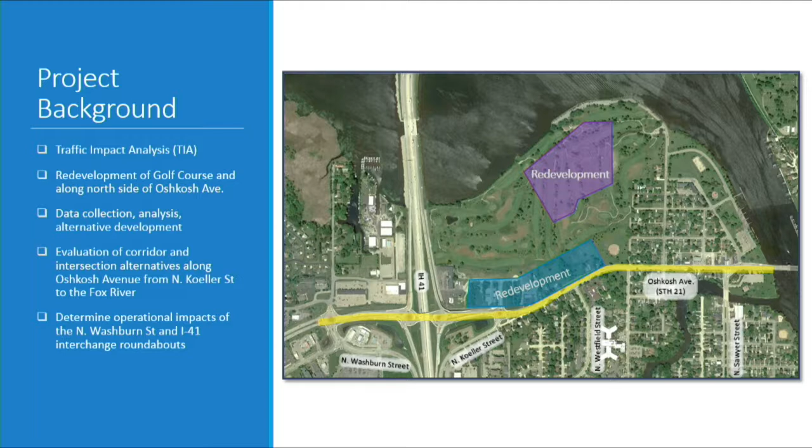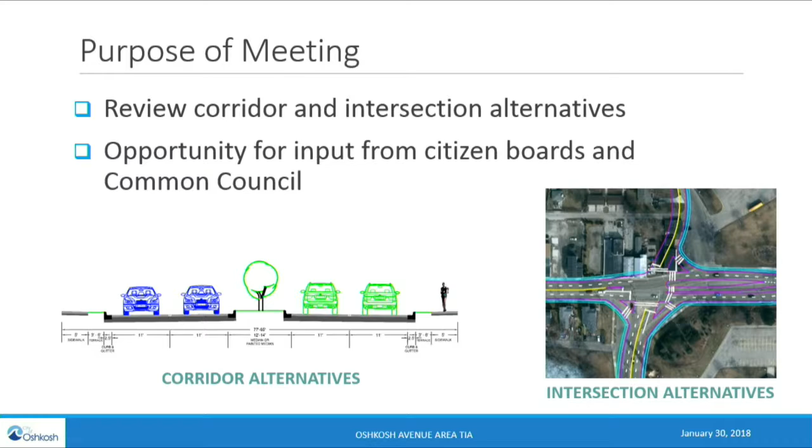Our main focus was the intersections in the corridor that is operated and maintained by Oshkosh, from Koeller Street to Sawyer Street on the east side of the interchange. West of there, at the interchange and Washburn, we just looked more at operational impacts, which we won't go over as much today unless anybody has questions. So the purpose of this meeting is to go through some of the alternatives quickly, talk about the recommendations, and get any input or questions from you guys and from the public.

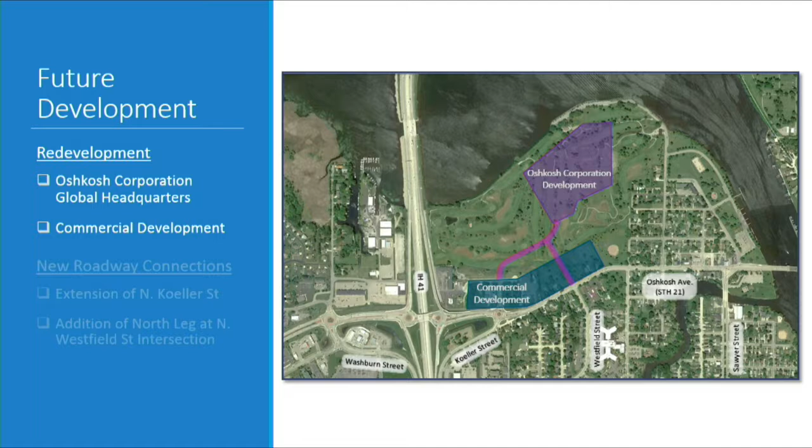As far as future development goes, I'll kind of quickly go through this. Oshkosh Corporation development is taking over some of the golf course that's there now, and in addition, there'll be some commercial development on the north side of Oshkosh Avenue. As part of this, we'll have 2 new roadway connections: an extension of Koeller Street to the north, and an addition of a north leg at the North Westfield Street intersection.

Just to give you a little more background about the process we went through, we coordinated with East Central Wisconsin Regional Planning Commission and developed background growth and traffic growth conditions. This would be any development outside of this particular development, to help us understand what the current needs of the corridor will be in the future. From there, we also developed traffic volumes for the new Oshkosh Corporation headquarters and that commercial development, and then assigned trips to the network.

Frozen? Oh, there we go.

From there, we did a traffic analysis. We looked at existing conditions, development completion in 2025, and a horizon year, about a 30-year lookout to 2045. We modeled with and without the development traffic and analyzed all the intersections from Washburn to Sawyer Street.

So to start, we'll begin with our corridor alternatives. I'm going to briefly go through all of these. Feel free to stop me if you have any questions.

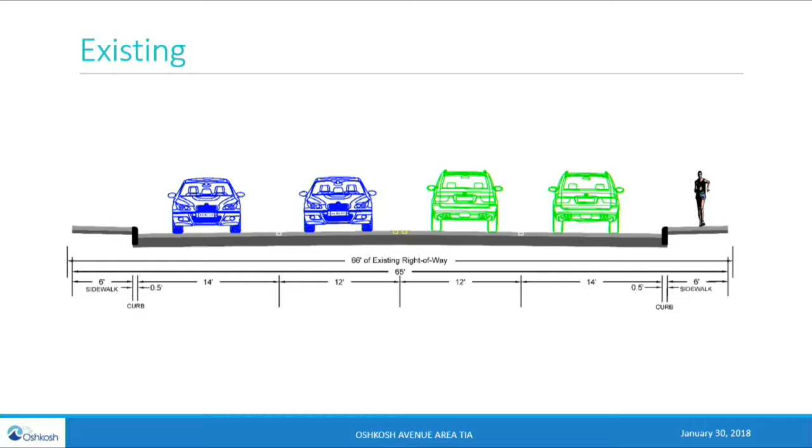As far as operations go, overall it does have sufficient capacity for through vehicles all the way to the horizon year. The main disadvantages are that there are no separated left turn lanes and poor lane utilization because of the lack of turn lanes in the corridor.

As far as safety, without a median or turn lanes, you have a higher potential of rear end crashes and angle crashes because you have more conflict points. It's also not as pedestrian friendly without terraces between the roadway and the sidewalks.

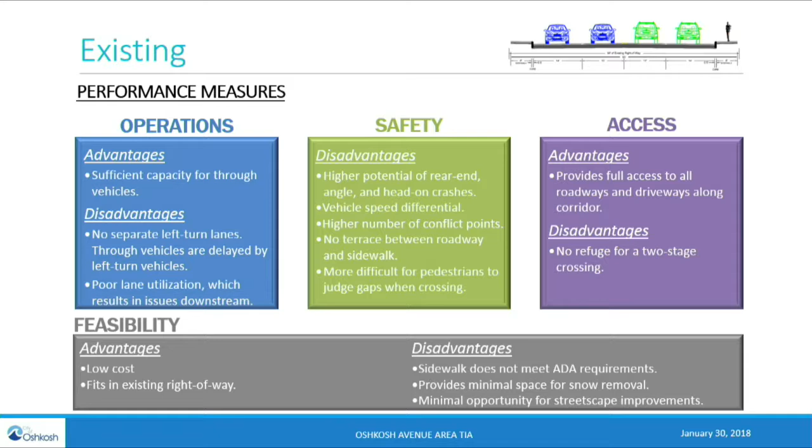As far as access, you do have full access to all roadways and driveways along the corridor to help provide optimal access to all. So overall, for feasibility, if you left it the way it is, it's low cost and fits the existing right of way, but there are some safety and operational disadvantages.

So that was our base condition. From there, we looked at 3 different alternatives.

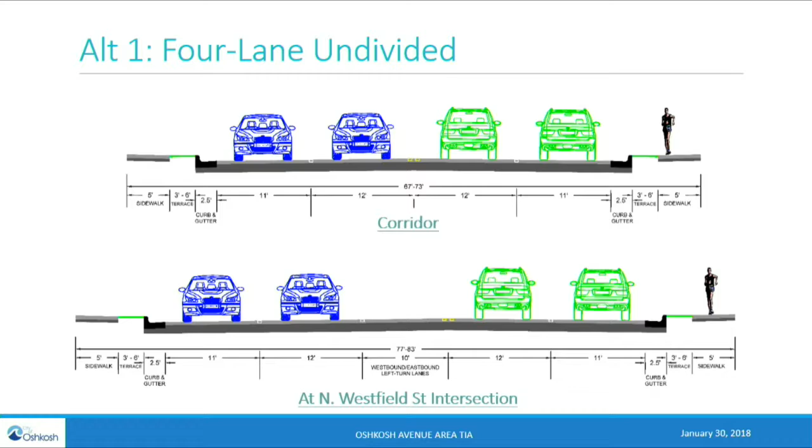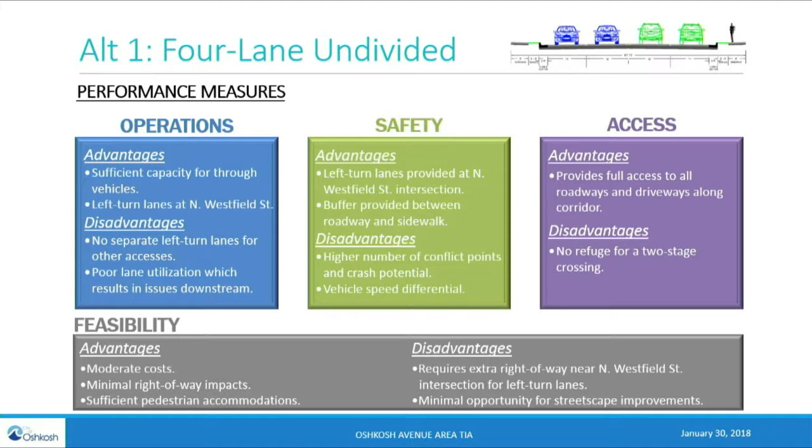The first is just an enhanced 4-lane undivided section. This would add terraces, making it more aesthetically pleasing and friendlier for pedestrian and bike users. In addition, we would recommend adding left turn lanes at the Westfield Street intersection. Other than that, it's very similar to what you see out there today.

The second alternative we looked at was a 2-way left turn lane. Essentially, you keep your 2 lanes of traffic in each direction, but provide a center lane for turning vehicles. Either eastbound or westbound could use this lane to turn left at any driveway along the corridor. With the limited right-of-way from Eagle Street to Fox River, we would have to reduce to 1 lane in each direction.

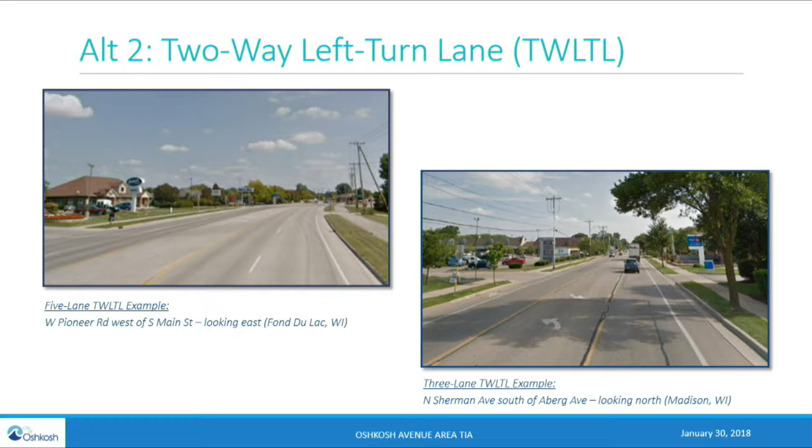Here are some examples. On the left is one with a 5-lane section that we could utilize between Koeller and Eagle Street. And when the right-of-way is a bit more restricted, the 3-lane option, just to give you an idea of what that would look like.

From an operational standpoint, this does provide better access for left turning vehicles into driveways, a bit more comfort level too, and better access for through vehicles because you're moving that traffic away from through traffic. It also reduces conflict points, so you're less likely to see rear end crashes that happen when somebody stops to turn left in a through lane for a driveway.

Isn't this similar to what we already have on Jackson, and how does that work there from an accident standpoint? I personally find it confusing, but I may be alone.

Yes, the five-lane section is exactly what we have on Jackson north of Murdock Avenue. I'm not aware of a significant traffic accident issue over there. If you've noticed, near Pick and Save and McDonald's, sometimes you'll get some opposing traffic that you just kind of have to wait out, and you might have to pause a little bit to let one side clear before the other goes. Overall, you typically will see fewer crashes at something like this than your traditional undivided section.

From a feasibility standpoint, this does provide better pedestrian accommodations and more space for terraces and things like that. But the transition from the 5-lane to the 3-lane section would be a little more difficult, especially the 3-lane with the lift bridge.

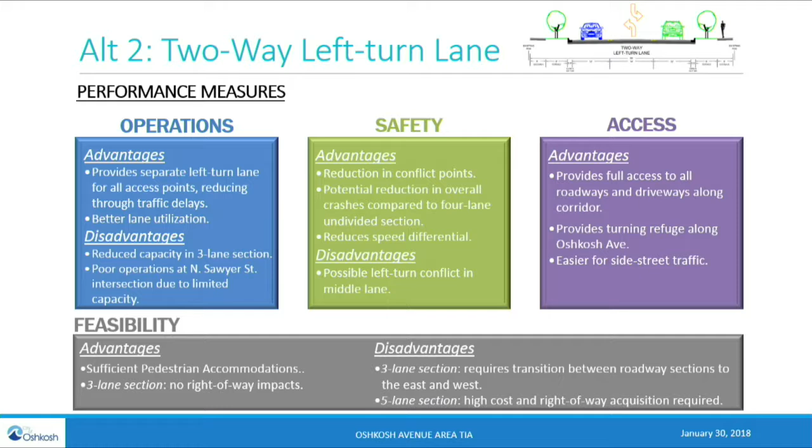So the last corridor alternative we looked at was the 4-lane divided. This would provide a median area that Oshkosh could potentially use for corridor lighting, trees, bushes, and make this a more aesthetically pleasing corridor, kind of a gateway to Oshkosh. At the intersections themselves, for example at Westfield, that would be reduced to a smaller section to add in those left turn lanes.

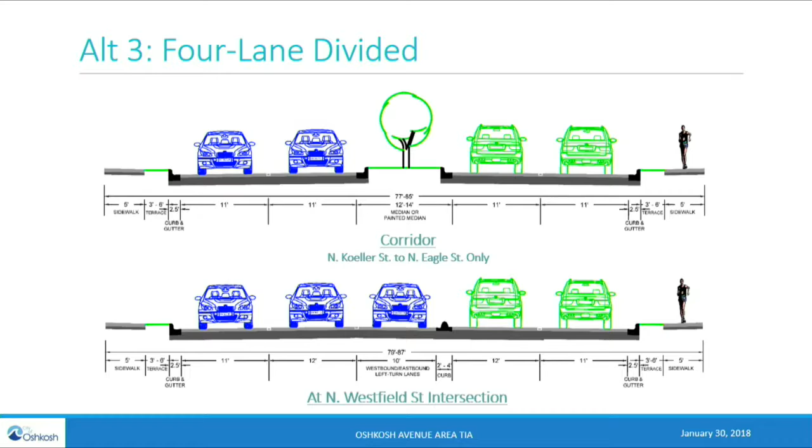The operations for this, as far as capacity, provide optimal capacity for all through vehicles, and it does give left turn lanes at your major access points. The disadvantage is there would not be median openings at many of the existing driveways along the south side of the roadway. In order to access those properties, you'd have to make a U-turn at one of the intersections. With the roundabout, it makes it a little easier to feasibly do that.

This alternative would only go from Koeller to Eagle Street. At that point, you would have to reduce back to a 4-lane undivided section again, because of how close the buildings are on both sides. As far as safety, this is the safest corridor alternative — you reduce all your head-on, angle, and rear-end crashes, so there's a lower potential for those crashes to occur. Can you point out Eagle on a map?

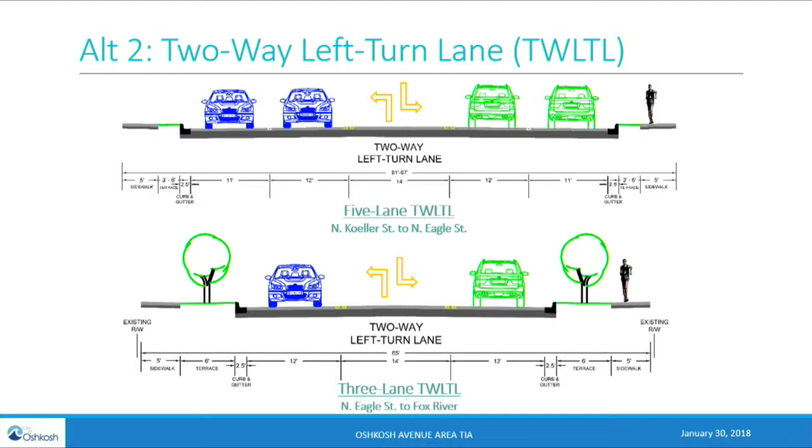Do we have that on? I have to go way back to the beginning. So Eagle, if I find out where this pointer is... yep, it's right here, right after the park. So at that point, you can see you have a neighborhood to the north, and several houses on the south side too.

So that alternative would be a boulevard-like section to Eagle. Okay, great — from Koeller to Eagle. Then we'd lose the median but keep the 4 lanes the rest of the way.

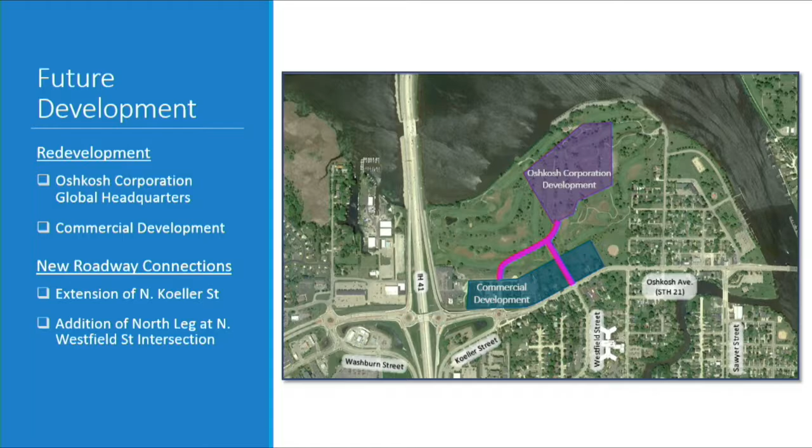I think I just have to be more patient.

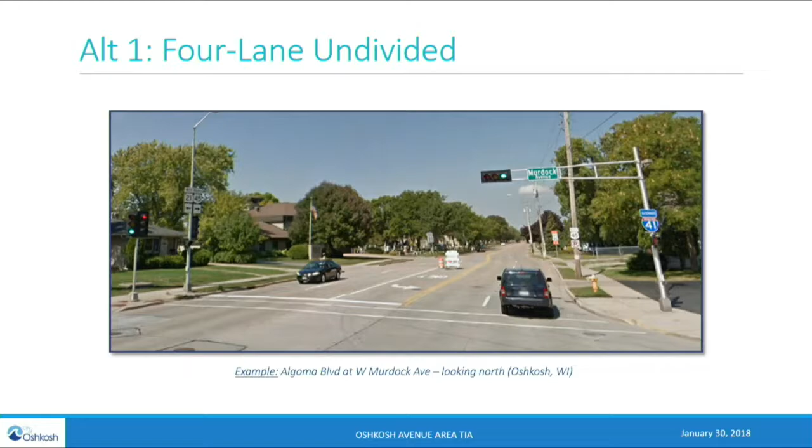So from a feasibility standpoint, again, this would provide the most aesthetic improvements or opportunities, would provide pedestrian accommodations, would have that easy transition between Koeller to Eagle, from Eagle to Sawyer, and overall safety and operations would be optimal.

So the right-of-way acquisition would be to the south or to the north? Right-of-way acquisition to the north. So those were the 3 or 4 alternatives we looked at from a corridor perspective. Does anybody else have any questions?

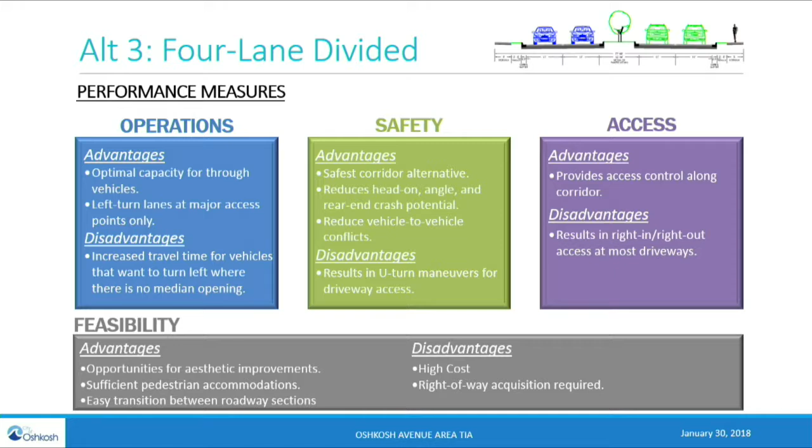Moving on to the intersection alternatives, and this, David, might give you a little more information about your question regarding the lift bridge — the Oshkosh and North Sawyer Street intersection. To start, I want to describe what's out there today. Overall, it's a bit complicated. There are essentially 3 different signals operating together, and each movement has to go through 2 types of traffic control to navigate the intersection, whether it's a signal and a yield sign or 2 signalized intersections. They work together, but it can create some confusion — it's a bit of an interesting layout.

The constraints to redeveloping this or redesigning this intersection are the bridge to the south. There's also a monument right here that we wanted to make sure to avoid, and then to the east you have the lift bridge. So this intersection has a lot of complexities that can make things a little more complicated, and things we wanted to consider while looking at alternatives to make sure that we're staying away from those bridges and preserving the monument and whatnot.

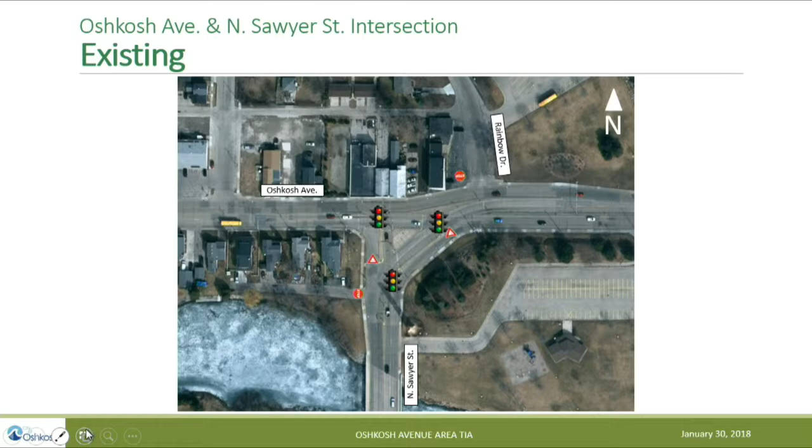As far as operations go today, it has acceptable level of service. From the standpoint of the lift bridge operation, it's efficient at relieving traffic. Obviously, traffic is going to back up when the lift bridge is in operation, but from looking at different possible intersection alternatives, this signalized approach is one of the better ones to alleviate that traffic.

Some of the disadvantages of the current intersection is that there are things that do not meet current standards with the way it's set up, with the multiple traffic controls at one location. From a safety standpoint, the intersection is a little bit confusing, and it doesn't have ideal pedestrian accommodations. I think the biggest thing with this intersection as it stands today is the lack of connectivity between the north and south of Oshkosh Avenue. So you have no direct access from Rainbow Drive, from North Sawyer Street, or from the eastbound side of Oshkosh Avenue.

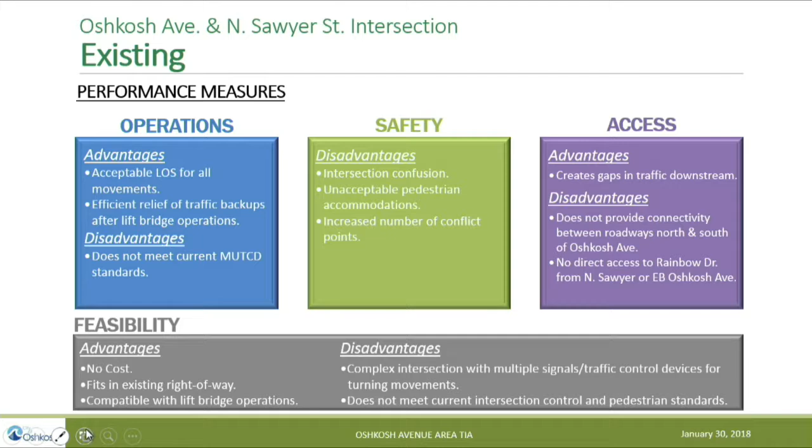Any questions regarding what's out there today or observations? In short, it's not good.

When you started your evaluation, did you check with the DOT about what the replacement timeline is for that bridge? No, we did not. We've had some conversations with the DOT. That bridge, I believe, if I remember right from our conversations relating to Jackson, Oregon, I believe that bridge was, as Steve indicated, constructed in the 1980s, which would mean we're a good 20, 30 years out from a full replacement of that bridge. So the point is that we don't have to go through what we're doing on Oregon Street worrying about what the bridge is going to look like. Yeah, it's a long time before that one would be looked at.

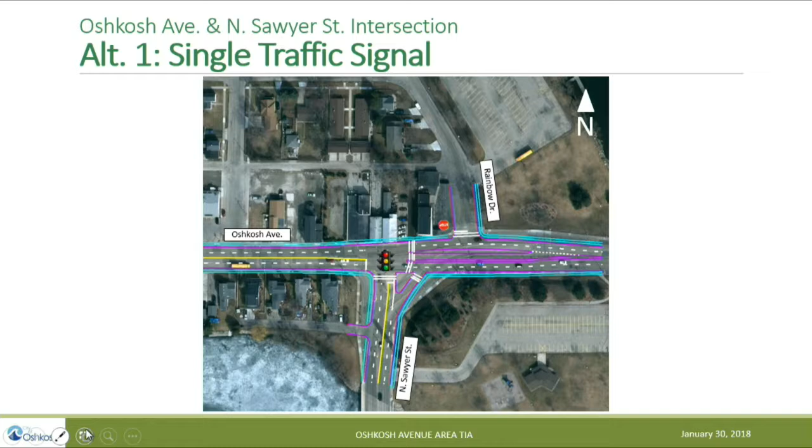So the first alternative we looked at was just creating a single traffic signal intersection and keeping the roadways as is, essentially a minimalistic improvement to the intersection. From an operation standpoint, this would work efficiently, again, with one signal. It'd probably even work better with the lift bridge.

And as far as safety, it provides better, more conventional pedestrian accommodations and fewer conflict points, less confusion to those drivers that are using the intersection.

Some of the access advantages of a signal in general is that it creates gaps in traffic downstream. So you have several unsignalized intersections just west of Sawyer Street. So a signal allows opportunities for stops on the main line, which does allow subsequent intersections to get a time to enter or exit Oshkosh Avenue.

Some of the disadvantages, I think the big thing for this alternative would be that it doesn't provide that connectivity between the north and south of Oshkosh Avenue. It would remain the same as you see today.

On a practical basis, what are the principal access points to either Rainbow Park redeveloped or the park at the golf course? Where is the traffic flow going to enter? Where are the intersections that we're going to have to look at those?

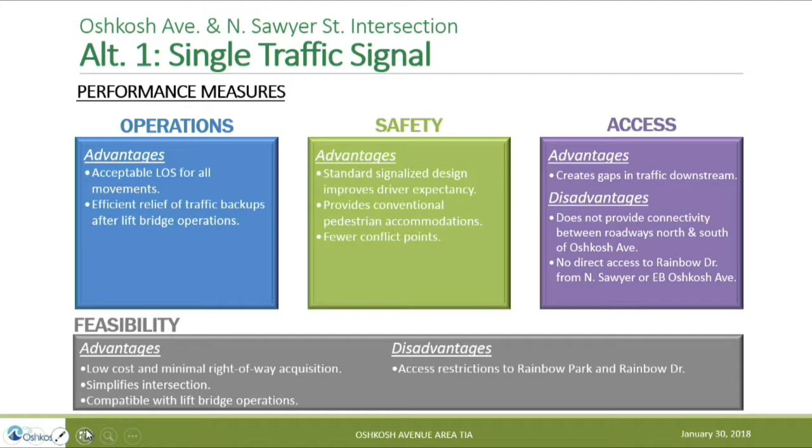That leads us into the second alternative for Sawyer Street. This alternative would essentially look at some sort of extension of North Sawyer Street to connect into Rainbow Drive. The advantage would be full access to and from Rainbow Drive from North Sawyer and from Oshkosh Avenue.

There are three different alternatives we looked at, and mainly the difference between these depends on what right-of-way is available or what property acquisition potential exists, looking at different options to either affect the duplexes in that north area.

There's also the bar, which Oshkosh has purchased, or is still looking at that? I don't know if it's gone through or not, but I believe it's in process. So essentially, these three different alternatives look at different ways to either avoid properties or keep properties around.

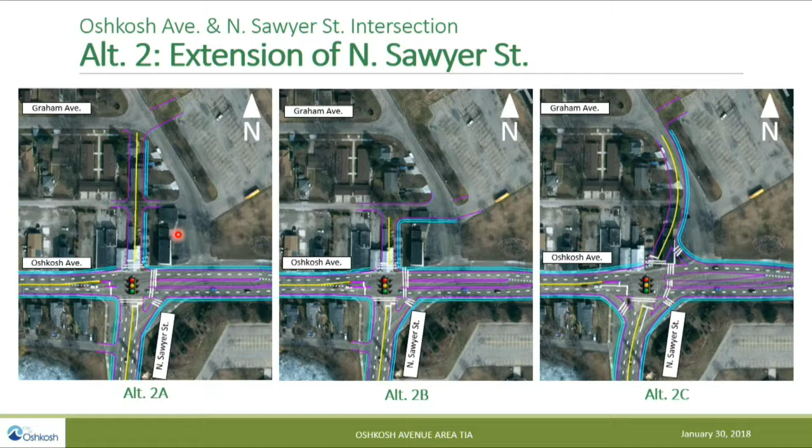Alternative 2A provides a more traditional intersection design and is more pedestrian friendly, being a normal 90-degree intersection. It does require acquiring access of the two duplexes north of the alley. But overall, this intersection provides optimal access to and from Rainbow Park and the boat launch from Oshkosh Avenue.

Alternative 2B is an extension of Sawyer Street to the alley. This requires probably the least amount of acquisition since it avoids the duplexes. But some disadvantages are it requires more vehicles to maneuver in a tight space. There's only about 175 to 200 feet between the alley and Oshkosh Avenue, so with boat traffic trying to navigate through there, it could make things a bit more difficult.

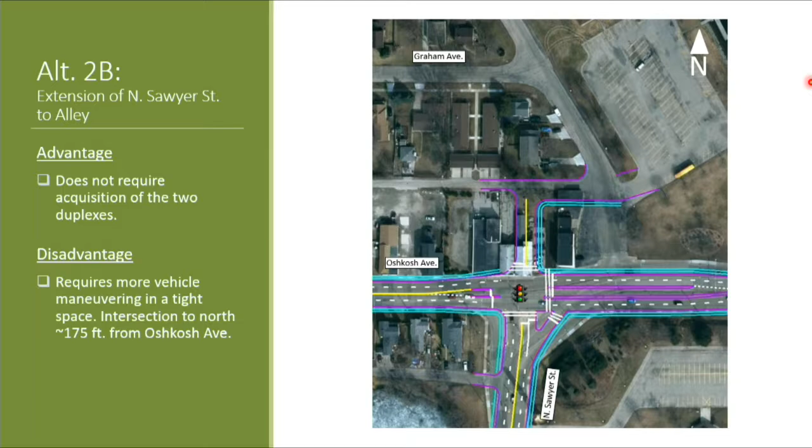The third one would reduce some of the impacts to the north by creating a slight intersection skew. From an operation and safety standpoint, this would work okay. It's a little less desirable for left turning movements, but further in design, if this was selected, you can make it work fairly well.

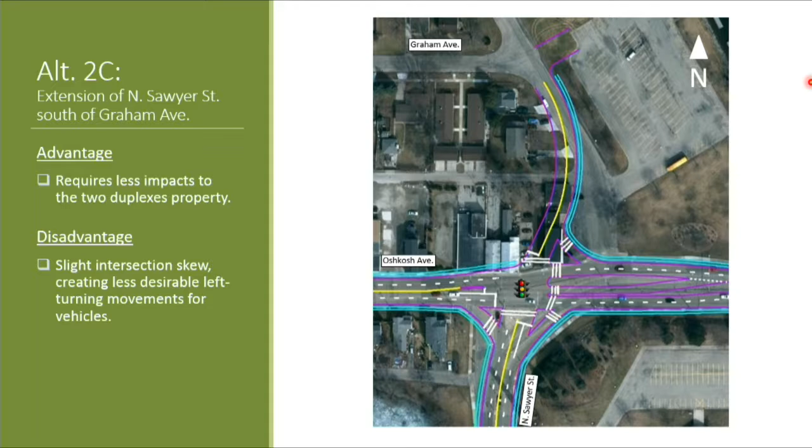For alternatives 2A and 2B, the Reps Bar property - do you think that will remain commercial, or would that be included into the park eventually? If we avoid acquiring it for A and B, then it can stay as a commercial concern from our perspective. That's why we've developed several different alternatives.

But I think that process is working itself out. I think we're looking at doing the acquisition. I do have to say too, the sidewalk is very close to that property - even today, it's right in that corner, which can make things difficult. It's a more efficient long-term option for that area to buy it.

What is the stacking for the left turn lane going east on Oshkosh? As you noticed, in all three of these alternatives, there's a very small eastbound left turn lane. Going into the next slide, I'll go through that.

With the limited right-of-way that we have in that area, because right where that red mouse is - I'm not very good with this - these are not owned by the city, so we had to get back down to the existing right-of-way pretty quickly. So left turn lanes for the eastbound direction are not ideal in these alternatives.

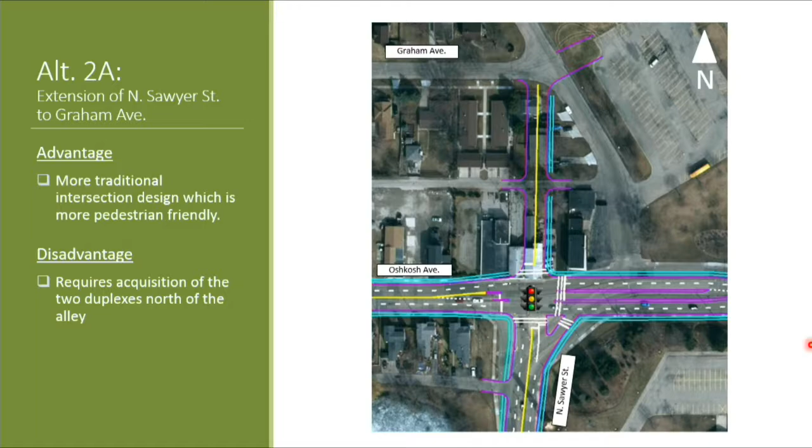When you go through this, can you give us those numbers, please? Yep, it's in the report. Did you get that? Yeah, on the first page — well, we printed the first 48 pages, not all the data tables after that. Okay, it's in the first 48 pages. It's page 15. Should be on page 20. It's the trip distribution for Oshkosh Corporation, so it's exhibit 4.4A.

So those percentages were provided by Oshkosh Corporation of where their employees were. It's easier to read — they have it broken down on page 16. Oh, yep.

I think overall with the lift bridge and the concerns there, as part of our analysis, you're right, we did do counts in December, but we do consider seasonal factors and things like that when we look at things. We were very conservative on projecting development volume that would be in this area as part of the commercial development to add traffic. We also looked at background growth and went all the way to 2045 with an analysis.

I think that helps assure that, when the lift bridge is down and intersections are operating normally, you'll see good operations. Oshkosh staff also required a level of service C or better for all these intersections in 2045, which is a little higher expectation than what you'd see with a WisDOT project and things like that. So they kept things aggressive as being operationally adequate. That should help.

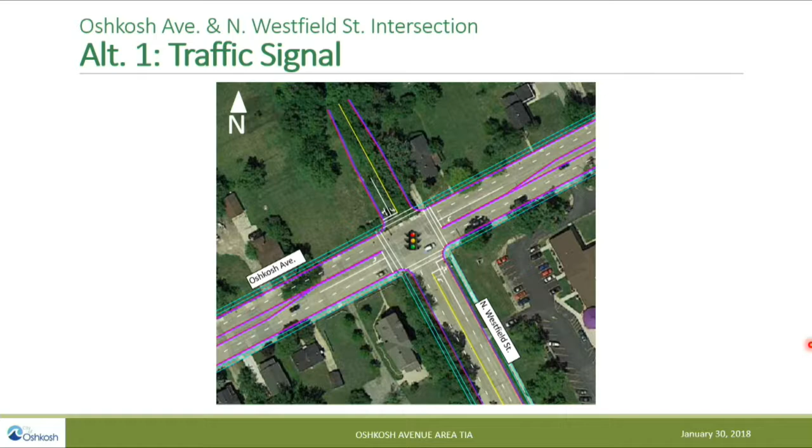So those were the ones for Sawyer Street. Moving on to Westfield, we looked at two different alternatives: a traffic signal, which would be very similar to what's there today, except you would have the north leg added to the intersection, and then there would be left turn lanes on Oshkosh Avenue. As far as operations, this would provide acceptable operations in the future and would provide those left turns into the commercial development and then also to Oshkosh Corporation.

It would also be nice for pedestrians. You would have pedestrian signals there with the daycare and the high school and things surrounding this intersection. It provides easier access for all modes of transportation. And then it does create those gaps downstream, like I talked about at Sawyer with the traffic signal alternative.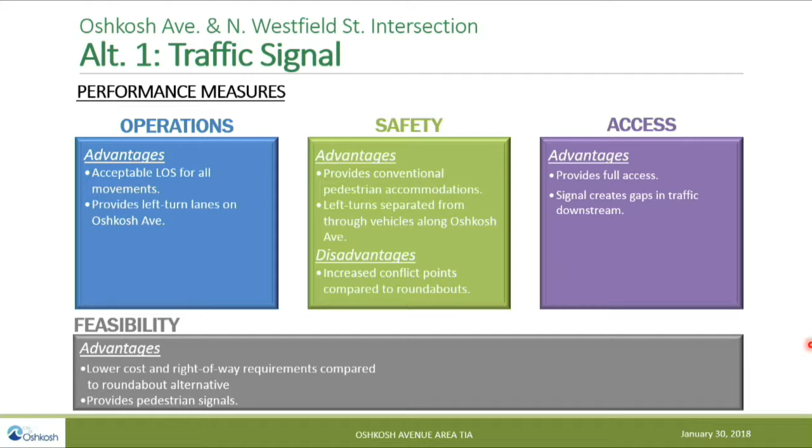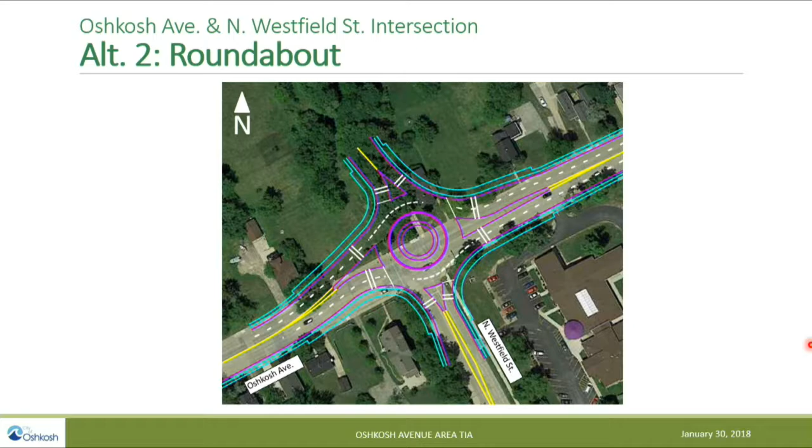The second alternative for this intersection was the roundabout. As you can see, the footprint's a lot bigger for this type of traffic control. Looking at some of the performance measures, you would have acceptable level of service, and you could have that continuity or consistency between the intersections to the west.

However, as far as pedestrian friendly, it'd be a little less friendly to those multimodal users, and it wouldn't create those gaps in traffic downstream for those unsignalized intersections. So I think for the most part, the higher cost and significant right-of-way makes this alternative a little bit more difficult.

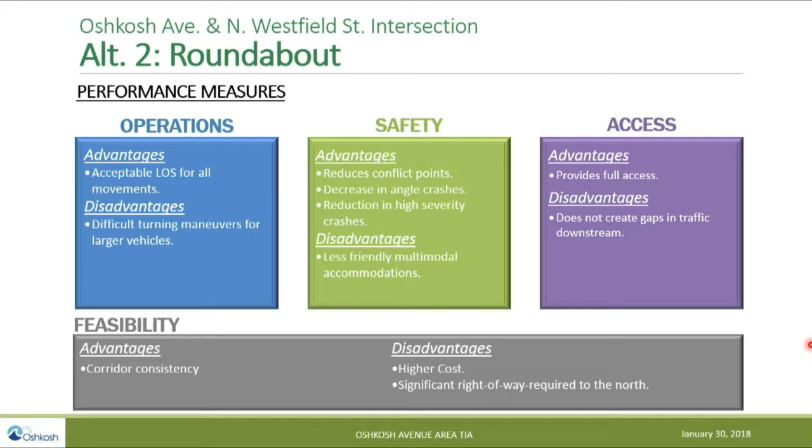Lastly, the Koeller intersection with Oshkosh Avenue. Here's a picture of the existing. Our goal was to minimize improvements here and only improve things as needed since this was recently built. So based on our traffic generation, the north approach would have unacceptable level of service during the PM peak.

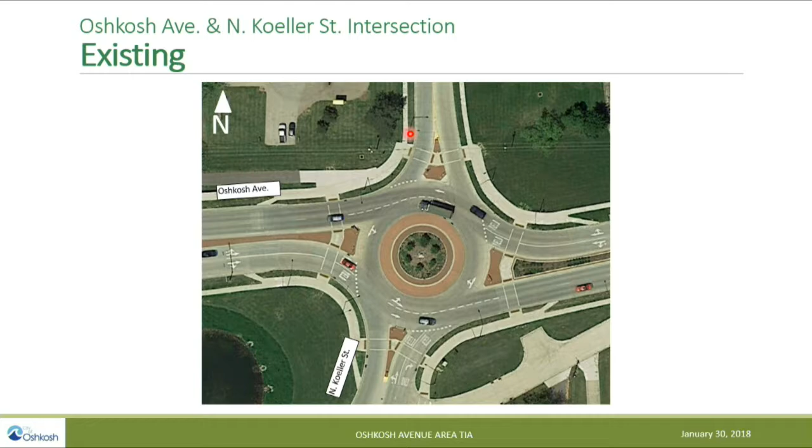So the main movement out of Oshkosh Corporation would be from this roundabout. During the PM peak with a single lane, the existing roundabout would see some operational issues. To improve that, we would recommend an additional lane for that approach, and it would look something similar to this.

From there, it will be a very busy intersection during the AM peak. We do anticipate by 2045 that there'll be some queuing as you get closer to the interchange, just with all the development in this area, but it will operate at acceptable levels.

The additional lane that's being shown on this approach is a right turn only lane, so traffic on Koeller Extended would get a dedicated right turn lane onto Oshkosh Avenue. The existing lane that's there will become a straight or left turn lane, whereas right now with the single lane, it's all three movements. Because of the high volume of traffic leaving the Oshkosh Corporation site to get to the highway or travel west, there's a high volume of right turn traffic, which is why we wanted to look at this dedicated right turn lane being added to this approach.

So is there property acquired along the west? It looks like there'd be a little bit to develop the lane at the south end, but not the entire length, if I remember correctly. No, you'd be able to tie back in if you wanted. It looks like starting about the middle of the building or so is where there'd be a little bit needed in order to develop the extra width here for the turn lane and the sidewalk in this area.

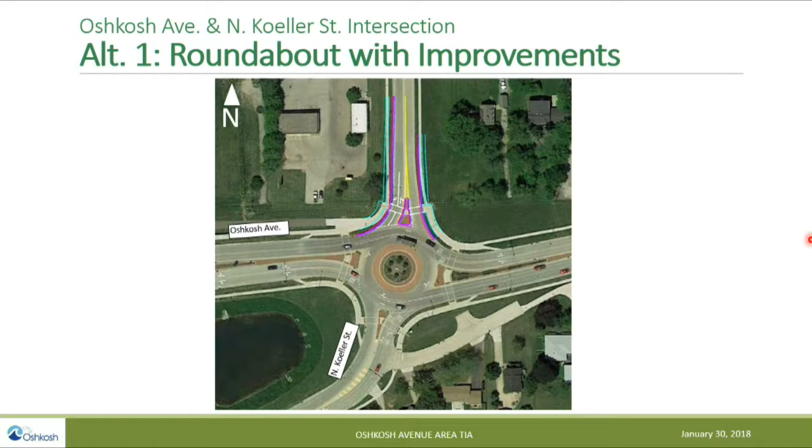So just to go through the recommendations for the corridor, from Koeller to Eagle Street, the recommendation would be the 4-lane divided section to allow for optimal safety and operations, and also provide that aesthetically pleasing gateway corridor for the city. And then from Eagle to Fox River, since we are very restricted with right-of-way, stick with the 4-lane undivided, and you could improve things such as provide terraces and whatnot, whatever the city would desire to do there.

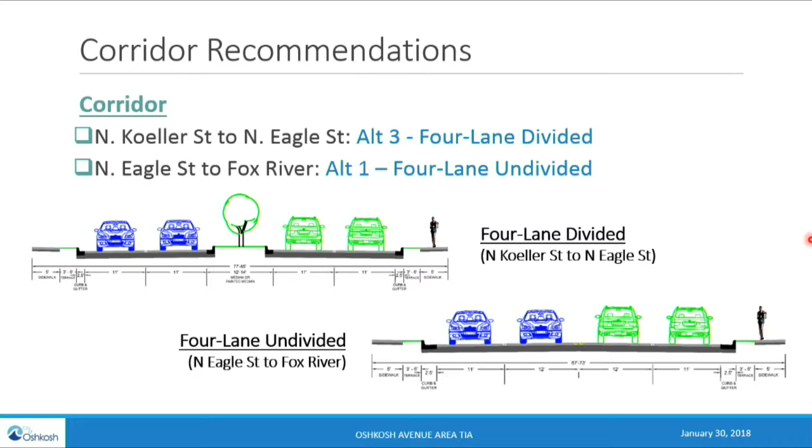From the intersections at Sawyer Street, we would recommend either 2A or 2C with the traffic signal extension of North Sawyer Street. So essentially either going straight north and connecting into Graham Avenue, or providing that slightly skewed intersection would be the recommended alternative. At Westfield, it'd be the traffic signal with left turn lanes, and then at Koeller, the roundabout with the right turn, southbound right turn improvements.

And I think that's everything. Questions? Is Westfield before or after Eagle? Westfield is west of Eagle.

So, can you go back to that picture of Westfield? That doesn't show the median in it, does it? Yeah, you can see here, the median approaches, and then the median minimizes to allow the space for the development of the left turn lane. Again, you've got the small bit here, and that expands out to the median once the left turn lane is not there.

And why not a roundabout there? A roundabout would work there, but it would require more right-of-way, so it would take away from some of that potential commercial development. Also, it's a killer for pedestrians, yeah, exactly, with the park development there. You've got the Park, high school, you've got the daycare. It's a little bit more pedestrian friendly to have pedestrian signals available for pedestrians, and again also the downstream traffic too of those unsignalized intersections at Eagle, Fox, and whatnot, to allow those vehicles to have an opportunity to enter and exit at Oshkosh Avenue.

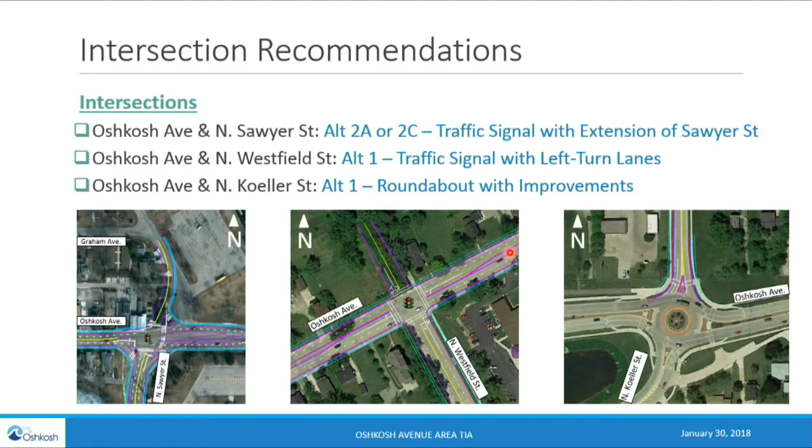Any other additional comments or questions? I will say that I did get one call before the meeting today from a resident along Oshkosh Ave, probably east of Eagle. I guess they were concerned with the amount of traffic that's being developed out there. It's going to happen with Oshkosh Corp. They have a hard time making left turns out of their driveway, going to go west. Is there anything that can be done to alleviate some of that, to make it easier? I'm not sure if there is an answer on that. I guess the other concern she had was traffic and speeding, so anything relating potentially to traffic calming was a concern that I heard.

Also, I should mention for the gentleman that had the bicycling question, we did discuss this at the meeting in January. I think one of the issues that will be considered there is just the level of car traffic, how much it works with bikes, but that was discussed at that meeting.

Are there any additional questions or thoughts to share? I think, on top of that, we're looking at alternative routes in that area to get you away from that roundabout, so we are looking at that. Well, we're gonna have that whole lakeshore. There'll be another one, yep. So it doesn't have to be on a state highway. That's the hope, yeah. All right, if there's nothing else from the public, then public commentary is closed.

Back to the commission. I think you're looking for us to approve this universe of choices. Am I? Yes, if you look at our recommendation on page 4 of the staff report, we were recommending that the Plan Commission adopt KL's recommendations for the TIA as follows, and you can see the general corridor improvements. I should have separated out intersection, but if you see A, B, C, and D, we were asking that you take a vote. I think the Traffic Review Advisory Board voted on each of these items, right, Jim? A, B, C, D, and E, or not? Okay, so we're requesting you to have a motion for each of them.

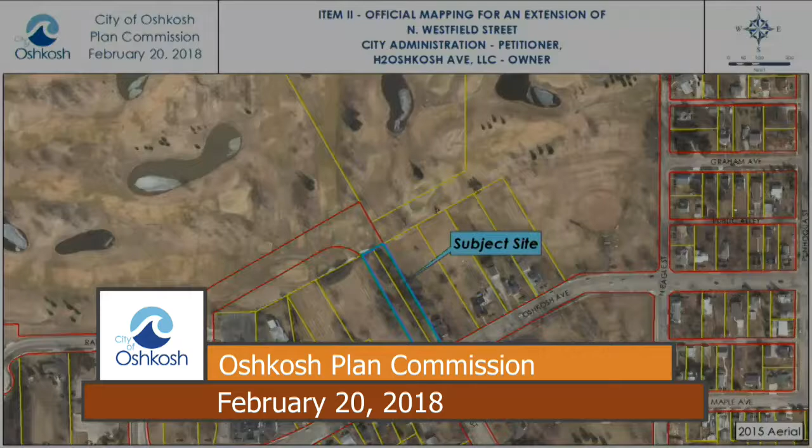Here we go, item number 2. So what we're requesting is the official mapping for an extension of North Westfield. Here is the subject site. It is part of the development we've been talking about. You can see Oshkosh Avenue in North Westfield.

The mapping lines up, I believe, with the center line of North Westfield Street. It's about an 80-foot right-of-way by about 400 so odd feet. We proposed to line up with that extension of Keller Street through here, and then eventually there'll be North Street access to the north. What the official mapping does is allow us to reserve that area as right-of-way for purposes.

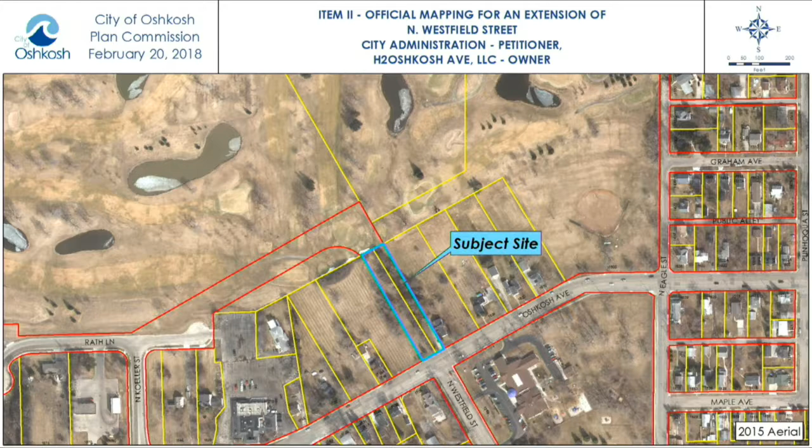Basically, we're asking you to approve of the official map as requested and laid out in the staff report. Are there any technical questions from the commission about this mapping item?

David: I take it this would be 4 lanes and sidewalks, is that sort of what's planned? Steve will come up and help with that one. I believe from the KL presentation, it's actually a 3-lane setup, a single lane in on Westfield with 2 lanes at the intersection for left, right, or straight. I'm not sure exactly how those are marked, but that's what was shown in the TIA that was just went through. Which mirrors the other side of Westfield as well, right? Correct. Any other technical questions?

Seeing none, anyone here from the public to speak to this mapping item today? Once? Twice? Okay, public comment is closed. Back to the commission.

Motion to approve? Second. Been moved and seconded. Any discussion on the motion? Seeing none, call the roll please. Kiefer, Aye. Harry, Aye. Mott, Aye. Borsick, Aye. Ford, Aye. Wojtek, Aye. Motion carried 6-0.

If you can recall, I think we disposed of a portion of this land, I think last year. It was part of the park, but it was a triangle, a really weird shaped piece of land. You can see it. So last year we had an action where we disposed of this section of land from the park to this property owner.

What happened was our park was zoned for institutional purposes as a public park, so now it's kind of a split zone parcel between single family and institutional. What we're requesting is we're simply cleaning it up and making that former chunk into residential zoning, so this will become SR5 zoning after this action. Got it. Technical questions?

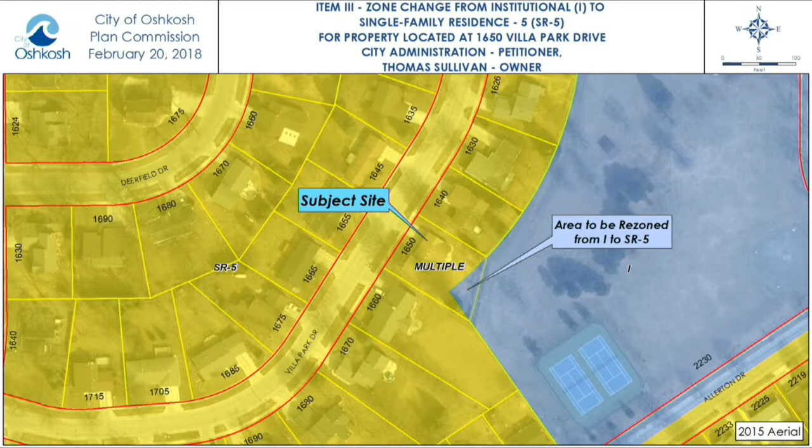Seeing none, anyone here from the public to speak to this item today? Okay, back to the commission.

Make a motion to approve. Second. Been moved and seconded. Any discussion on the motion? All right, seeing none, call the roll please. Kiefer, Aye. Harry, Aye. Mott, Aye. Borsick, Aye. Ford, Aye. Wojtek, Aye. Motion carried 6-0.

Item number 4, another zone change. This is zone change from Central Mixed Use District, CMU, to Central Mixed Use District with Plan Development Overlay, CMU PD, and approval of a general development plan and specific implementation plan for property located at 566 North Main Street.

Thank you, Mr. Chairman. So, we've discussed this project previously with the applicant at a workshop. This is the owner of Fletch's. They had come to you in a preliminary discussion. They were previously approved to do an outdoor patio space, and while doing that, they would like to raise the height of the fence around their outdoor patio. In order to accommodate that, we have to go through a couple of steps.

The first is adding a plan development overlay on top of their existing zoning. So that is where our zone change from central mixed use district to central mixed use district with a plan development overlay comes in. That then gives them the ability to come into this board and request a plan development to raise that fence height. So they're applying for both the general development plan and specific implementation plan at this time.

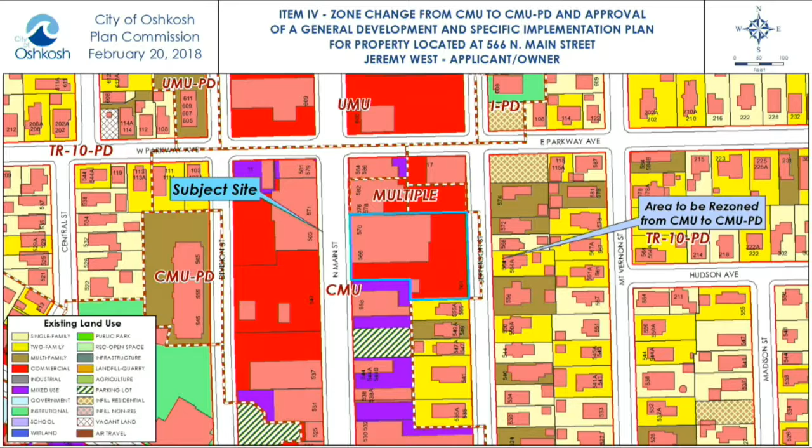Just general location of the property, it is on the Main Street corridor, within our central mixed use zoning district. So here is an aerial close-up of the property. Fletch's would be the southern white building, if I can find my cursor here.

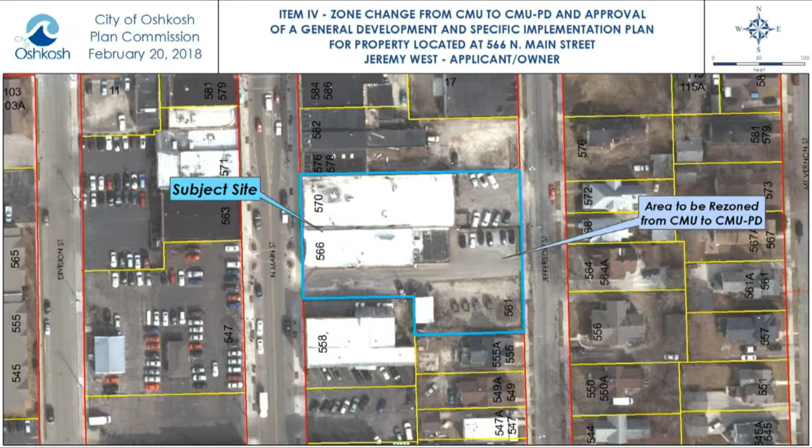The outdoor patio in and of itself was previously approved. Today we're just here to discuss that fence height.

So if this board is in favor of the fence as shown, they would have to add an additional base standard modification onto those listed within the staff report to approve a fence of this nature.

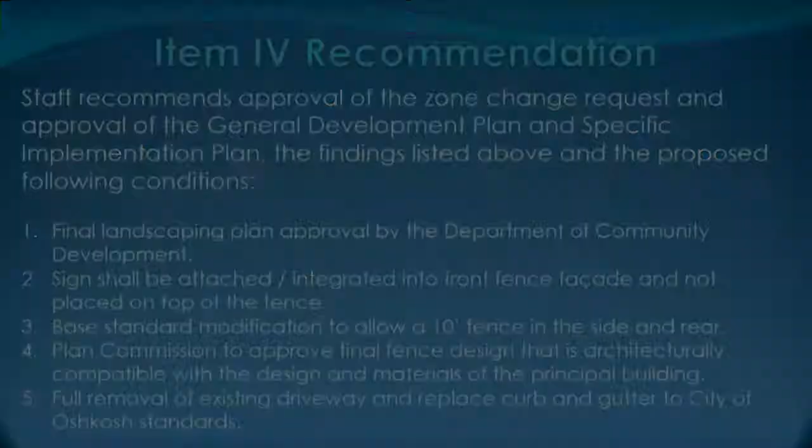There is another fence in the area at Peabody's that is a similar wood style to this, Darren said. So there is one in the area that is similar to what is being proposed presently.

Speaks from experience. So a couple of conditions: we are recommending approval of both the zone change and the GDP SIP level.

The first is that the final landscaping be approved by the Department of Community Development, keeping it in nature with what we've done with this type of project in the past. They are not required any landscaping per code for this project, but we want to make sure that the type of plantings they choose do meet our ordinance requirements for salt tolerance and species commonly used in this area. So just that oversight, making sure we're not doing anything that would not be consistent with what we've done in the past.

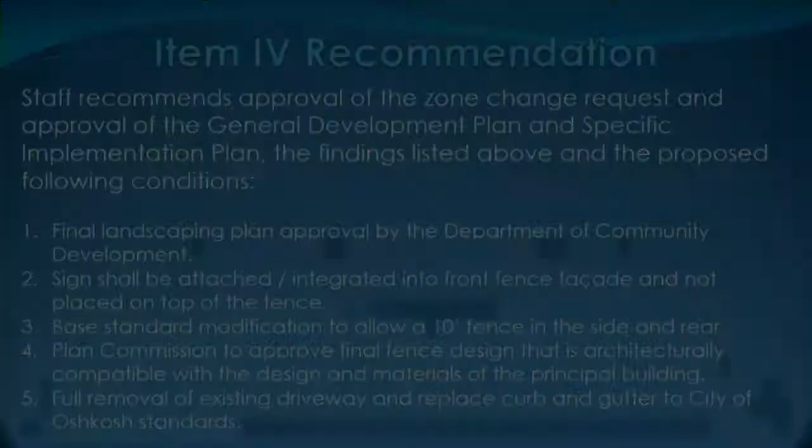Staff is recommending that the sign be attached or integrated into the fence instead of sitting on top of it. We've seen that done in a lot of other areas. It also, by being on top of that entryway, gives a 10-foot element to that front portion of the fence, and we would like to see that front element remain at 8 feet, with the 10 feet not starting until it wraps around. So we're just recommending that the sign be integrated into the 8-foot portion of the fence.

Base standard modification be approved to allow the 10-foot fence in the side and rear yard, and that Plan Commission have final approval of the fence design that is architecturally compatible with the design and materials of the principal building. We just want to make sure this body does have a chance to approve the final design of the fence.

If they're happy with what is being proposed today, you can approve that as you see fit. Or if you would like him to come back with an alternative design, he can bring that back to you.

And finally, there is a driveway, and I wish I had a better picture of it, an old driveway that goes in front of it. Department of Public Works has requested that drive entrance be closed and returned to curb and gutter as part of this project.

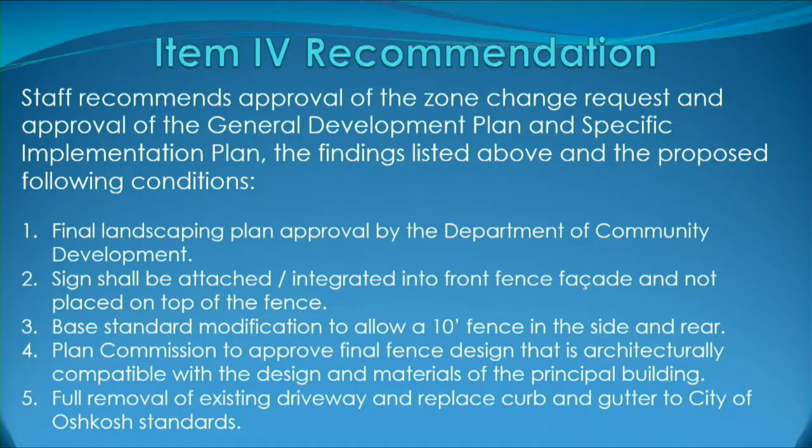I have a technical question. Is Peabody's fence approved? It was pre-code. The 2017 code introduced this element saying fences should be architecturally compatible with the building they're in conjunction with. Technically, it's not conforming.

Other technical questions? Was there something about concern of stormwater runoff? No, the stormwater was previously approved as part of the outdoor patio space. I thought there was something about the fence needing to be off the ground. Correct, it was noted in the original approval of that outdoor patio that there be a 4-inch gap under the fence so as not to negatively impact the existing stormwater runoff plan.

Other technical questions? Okay, seeing none. Anyone here from the public to speak to this item today? Come on up, sir. I'm Jeremy, I'm the owner. Could you give us your address, please? Sorry, Jeremy West, I'm the owner and the petitioner.

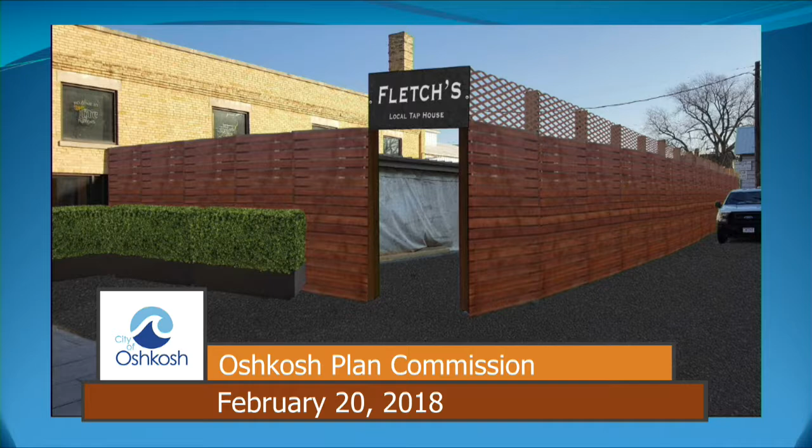Just a couple questions. Can we go back to the slide showing the fence real quick? That one. So I certainly have no problem bringing that sign down and integrating it into the fence. Then I think at that point I would maybe angle it so the lattice wouldn't be at 10 feet right on Main Street. It would go at an angle back up, about 7 feet, so it doesn't look like just one wall. I think it would look a little better if it was angled leading back to that second post.

As for the curb, we were looking at—and I've talked to building inspection—using part of the front of that and possibly putting a food cart there concerning the driveway that goes in. It came to my attention that they were going to try to make that part get rid of that curb, or get rid of that driveway. So I don't know if the fence has to be contingent on replacing that.

Does it? Yes. Why? I'm just curious. Code requires that once the driveway is essentially closed, that it's no longer a vehicular access for a parking area or anything, the curb cut would be closed. That parallels along with that. What we see when they're not closed is people start using these driveway entrances to pull up and park on the sidewalk, using it to get into spaces that are no longer legal parking spaces, continuing to use them as parking even after the area behind has been terminated for that use.

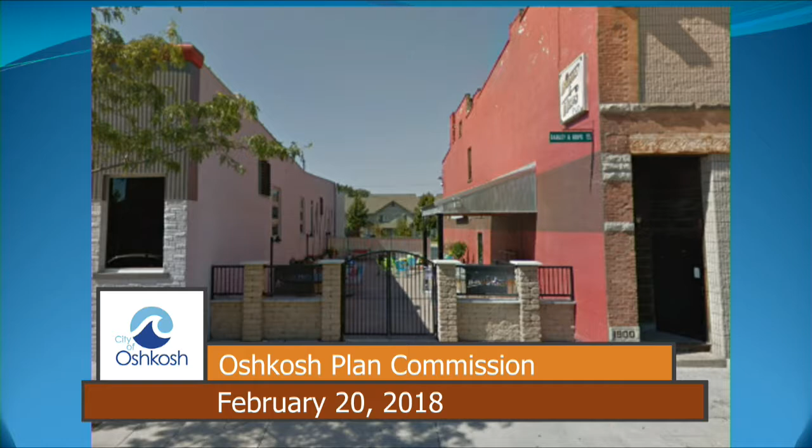I think from our perspective, just from a staff perspective, from a downtown perspective, we prefer to have more interaction at the street level, but that's a conversation we've not had with the Plan Commission to date.

So if we were to approve this whole thing as is, would you still consider going back and looking at fencing? In which case he'd have to come back, right? Yep. Is that something you're comfortable with? I mean, I've got to get to work on it at some point. That's my only issue.

We may not approve it as is. I'm just, no, I understand. I guess I just don't know what to say. I don't know. Well, it'll be part of our discussion. Okay, we may ask you to come back. Sure, I'm sitting right here.

Anyone else here to speak to this item today? Okay, back to the commission. Let's help this gentleman out. What would the commission like to do?

So if we had concerns with what the front looked like, are we talking just the front, and would we separate out the long run?

You could definitely do that. I think what we were saying, our main concern was that interaction at the front versus the whole side. We understand it would be impractical to put in 90 feet or so of wrought iron and concrete fence, because that'd be a huge investment over and above what Jeremy's already done on the two sites, and he's done a wonderful job.